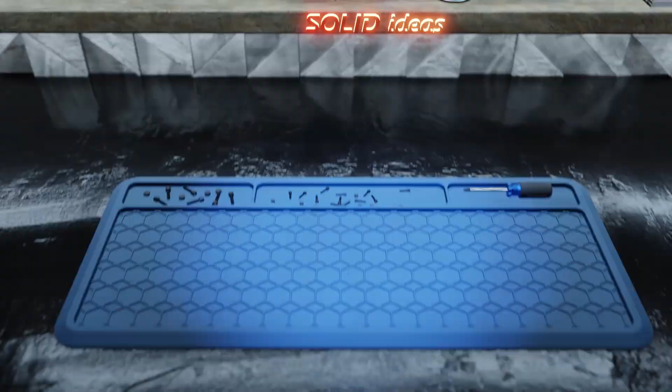So here we'll be filling out this pocket with this sort of honeycomb shape, and we're going to be using the fill pattern to do this. Now, what we need to do to make that happen is to make the first seed feature and then find a region that we can fill that with. So it's a pretty straightforward process. Just like the last episode, let's jump back right to the beginning and we'll start from scratch here. So I'll roll back in the tree and we can recreate this again.

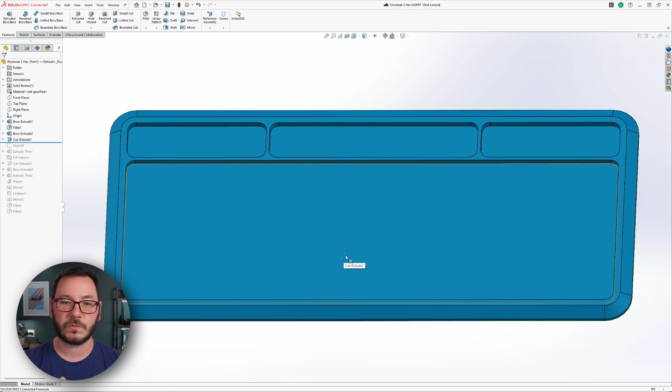So the first thing that we're going to do is start off with this sketch. Now from the rib, we wanted to start from the top and work our way down because we had those end conditions to take advantage of. In this case, we're going to be just drawing the actual seed that we're going to pattern, so it doesn't really matter. I'm going to start off with a sketch on this bottom face, so we'll say sketch, and we'll mark off the middle for this as well. I'll just go vertical this time. And with our centerline tool, we'll just mark off from top to bottom, like that.

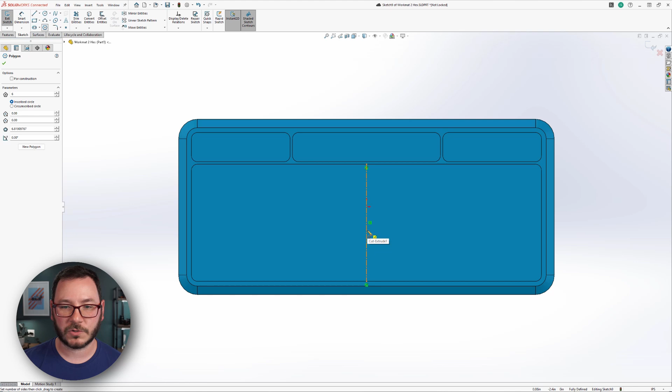And then we'll use our polygon tool, which is this guy over here. We can search for that or just grab it off of the toolbar, and we'll make our shape right in the middle here. All right, we'll set a dimension on this from here to here, just the width of the hex shape. So I'll select the two of those just using control, and I'll put a dimension in for that, which is 2 inches.

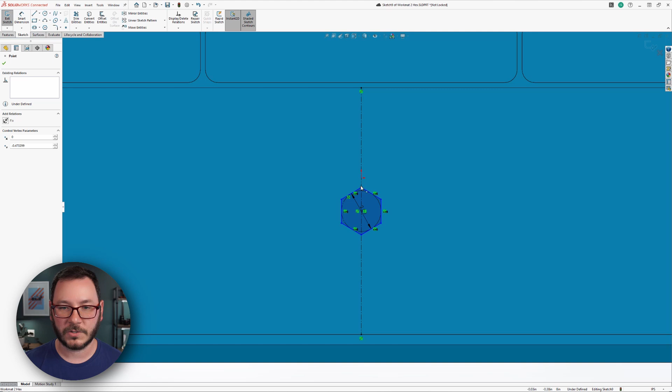And we'll lock this down by dragging and dropping this to get our auto relation to lock this in place, because right now it can do a little bit of rotation. So we'll lock that down in place. Unlike the rib where we left that underdefined and let that find its way, this time we want to actually make the geometry that we're looking to create. So that looks pretty good. We'll leave that like that.

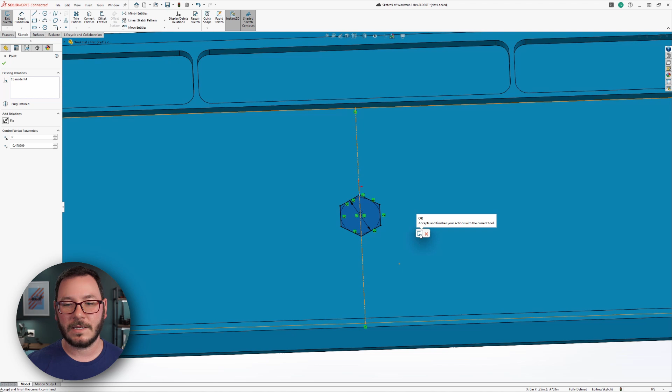And from here we'll create a thin extrude similar to what we did with the rib. So I'll use my D key, bring the confirmation corner to my cursor. We'll say exit sketch, and from here we'll create an extrude. So I'll just use my S key again. We'll select extrude, but instead of extruding this whole region, we just want to add some thickness to the edges that we're working with here. So in our boss extrude, we'll check on thin feature, which will take the profile that we have created and add some thickness to it.

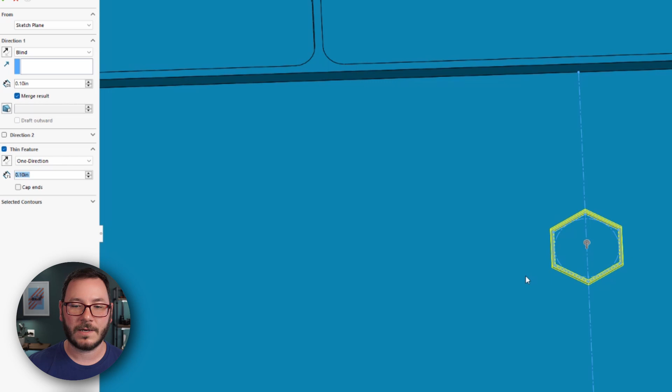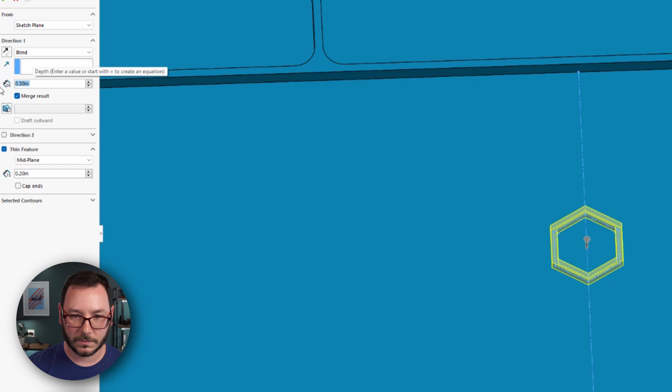So we'll go mid-plane on this. That's mid-plane for the thickness of the material, so the material that's added will be centered on the profile that we drew. That way we know what our spacing is going to be. So we're spacing on center, and we can add this thickness, maybe bump this up a little bit, and we can increase the depth of this to something to make that texture. Okay. That looks pretty reasonable. So we're going from the bottom and extruding up. So from here, we can say okay. And at this point, we're ready to make this pattern.

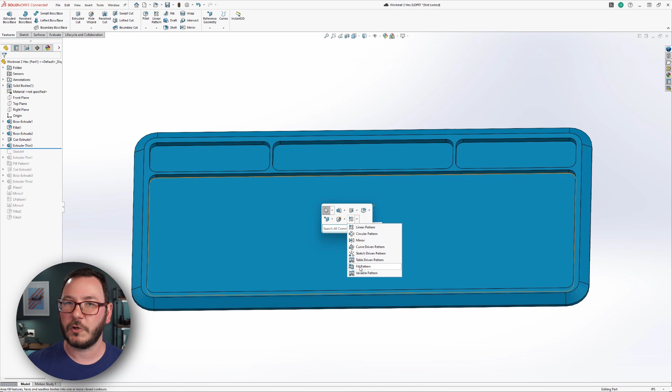Now, the pattern that we're going to be using is a specific pattern for filling in that region. So again, I'll use my S key, use the drop down, and we're looking for fill pattern. Now, again, I have the drop down customized. I'll have a video on more interface customization coming up. But if you're looking for it in the command manager, it would be in this same drop down under fill pattern. So if we select the fill pattern, let's go right in here and see what this does for us and see if we need to make any adjustments.

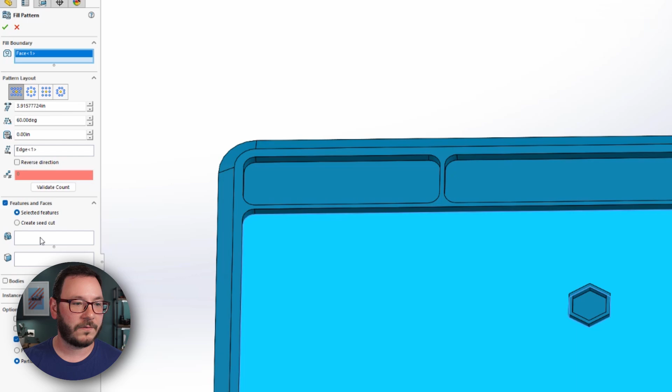So the first thing that we need to select for the fill is the fill boundary itself. This is the region that we're trying to fill out with the geometry that we've created. So let's say we select this face for the fill boundary, and we'll see how that works out for us. We'll select that face, and then for the feature that we want to fill, let's select the geometry that we just created, which is this little honeycomb.

So initially we're getting some pretty good results already. It's filling out that face with all of the multiples of the geometry that we drew, and it's filling it out using this pattern that we have selected. But you can adjust that if you have a different pattern that you need to create. You can select which pattern type you would want to have present here.

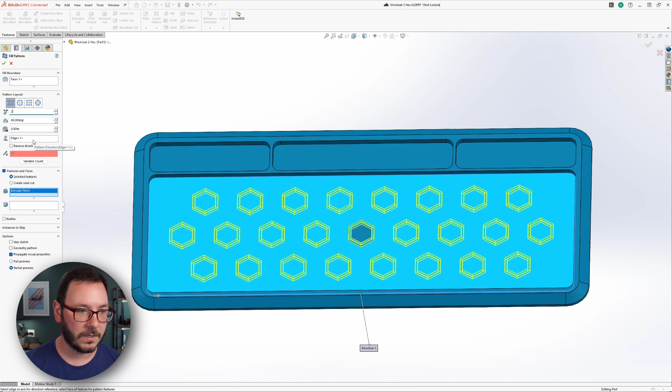So let's adjust our spacing to make this closer to what we want, because we want to fill this out with one continuous piece here. So we'll switch this to 2-inch spacing, which is what we have set as the width of that hex. And as soon as we do that, we see that it's now filling this out with some overlap, but we're running into a couple of issues.

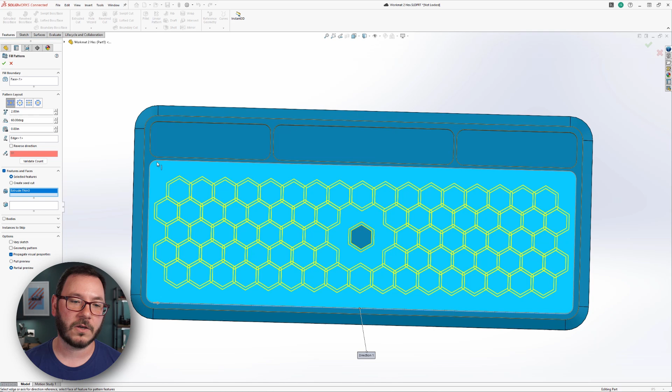First of all, we see that the pattern doesn't go all the way out to the edges, which is kind of what we want. We want it to fill this out all the way through the bounds. But because we're using this face as the edges, it's just filling out as far as it can go with the shape that we have, which is a fairly large 2-inch hex. So it's getting up as close as it can go, and then it says, I can't fit any more here, otherwise I'll go past the boundary that you've selected. Okay, so that's one issue.

We also noticed that around the center, we're having the exact same problem because we have the actual feature itself, which is taking up some real estate on the face that we have selected, and it's doing the same thing when it gets into here, so we're missing a bunch of instances in the middle because it says, well, I can't get any closer, there's something here, the seed that we created.

So when you're creating geometry like this, it's often wise to create a separate sketch as the bounds, because then you can say, this is just the region that I want to fill. Do what you need to do that.

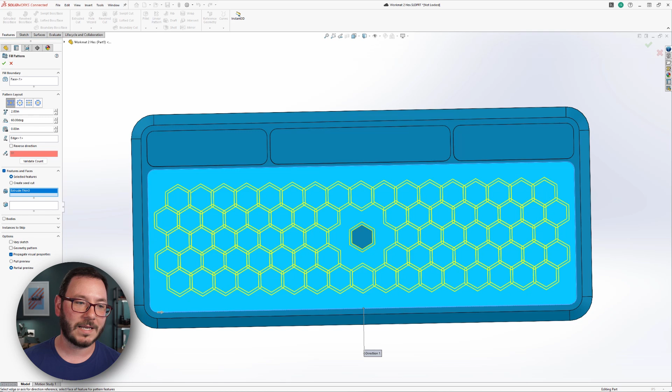So let's take a step back and let's create that by just referencing this face and making that its own boundary. So let's actually roll back one more to a point in time when that seed feature didn't exist, and we'll do the same thing. We'll create a sketch on that face, and we'll use this as our boundary.

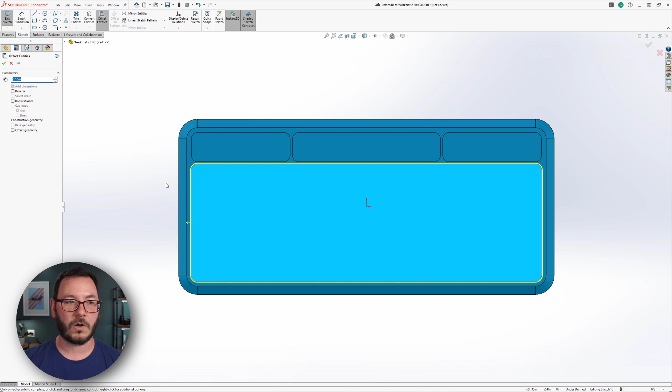Now from here, we can do an offset on this. I'll use my S key and I'll select the offset entities tool, and we can offset one side to the other. Now we need to make enough space that the boundary is gonna fill out all the way around. So let's say we do this at 1/2 inch towards the outside. All right, so we give ourselves a little bit of a buffer where this can fill in.

You might need to play with this a little bit because this will depend on the size of your seed feature that you're creating as far as what needs to actually give yourself as far as buffer to fit in where it needs to go. Let's leave it here and we'll see how that plays out for us.

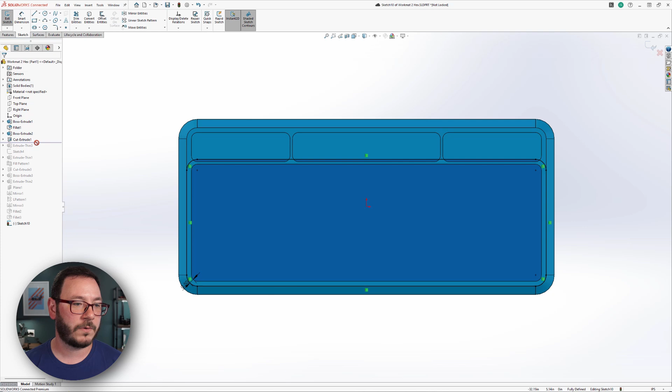So we'll say okay, and then we'll roll ourselves back down beyond, whoops, we'll exit our sketch first, and then we'll roll ourselves back down to the feature that we already created. So we'll do that. Maybe we'll rename this our boundary. Call that our bounds. And let's try this again.

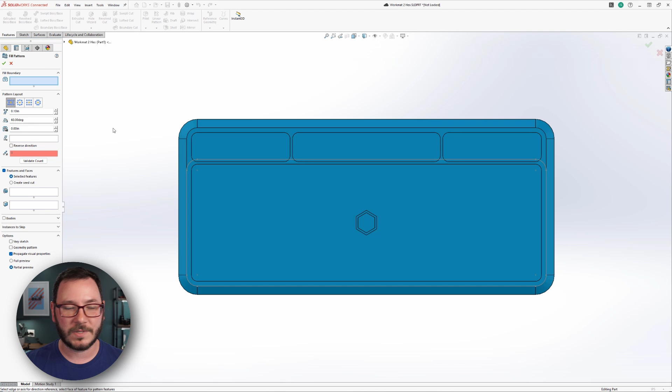We'll go back into our pattern. All right, so we'll go use our fill pattern. And from here, we'll try the same thing again, but instead we'll choose that sketch as our boundary. So our fill boundary will be this guy here. That should eliminate certainly the center issue that we were having, and we'll see how far things go when they get to the edges.

So we'll select our geometry again for our seed for the section that we would like to pattern. And we'll set our spacing back down to where we wanted that to go, so 2 inches. Okay, perfect. So that definitely solved our center issue, and we see now our overlap has enough to fit the hexes for around the edges, and that now fills out that entire region nicely.

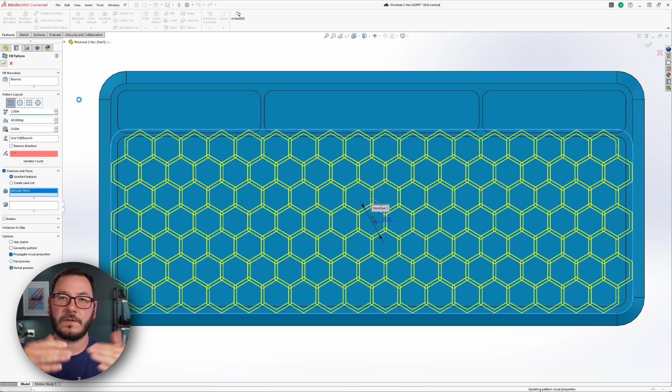So we'll say okay to this, and we'll let this go all the way out and see what this does for us. So we've now patterned all of these instances over top of each other. They're landing exactly where they should land on each edge because we did center to center and we did a mid-plane split on that geometry. And we now have this totally filled out, right, all the way through.

Now, one thing that you're going to want to consider with this method is what the boundary actually is. So we can see up here, we needed enough for the boundary for the feature to make it all the way out, which it has. The downside is now we've got this issue where we have a very thin section towards the top, and the boundary that we needed to make this fit, we now have some overhang.

So we can go back and play with the spacings of this. If the spacings aren't critical, we just need some type of pattern here. We can go back and play with the spacing, maybe move your boundary down, maybe shift your hex pattern up a little bit to try to get this to fit. Or of course, you can always go back and trim these back out if you want to do that towards the end, add another feature, and just remove that geometry back out again.

Totally acceptable. The next method that you might consider using would be to make this pattern using some kind of multi-body technique, and then you have independent control over this. Specifically in a case where you have geometry like this, where you've got these bevels across the edges, and obviously we have this thin ridge across the top, it might be a lot easier to try to control this independent of the rest of the geometry, and that's exactly what we're going to take a look at in the next video.

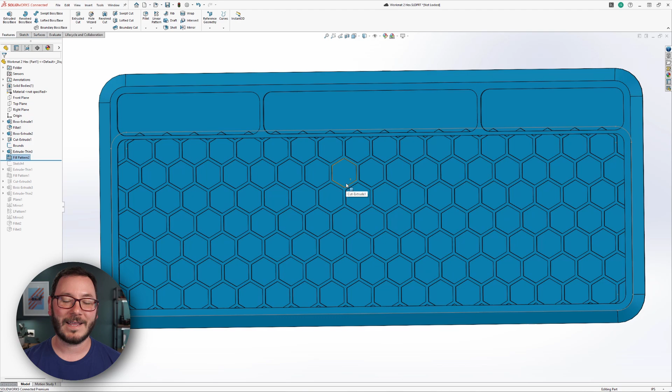So we've taken a look at the second option for creating that type of textured geometry using the fill pattern, adjusting our boundary, getting that to fit pretty close. In the next episode, we'll take a look at how to create any type of pattern, independently control it, and I'll see you there for the next one.